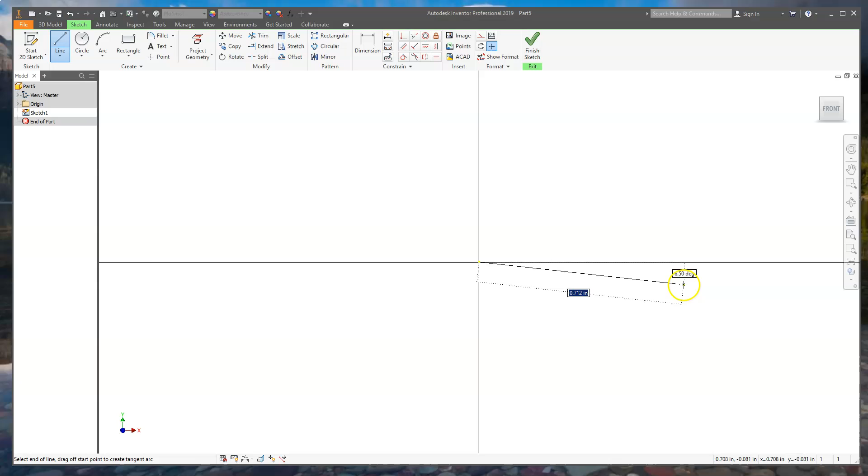So I'm going to do a revolve to make that cone. Going back over to Inventor, here we go. I'm going to go onto a sketch, go onto my XY axis, put a line on here. If you remember from the last video, I told you the key to success is get that overall length of your extrude on there first. So that is a 6 inch height. And then I'm going to click on the cube to zoom out here a little bit.

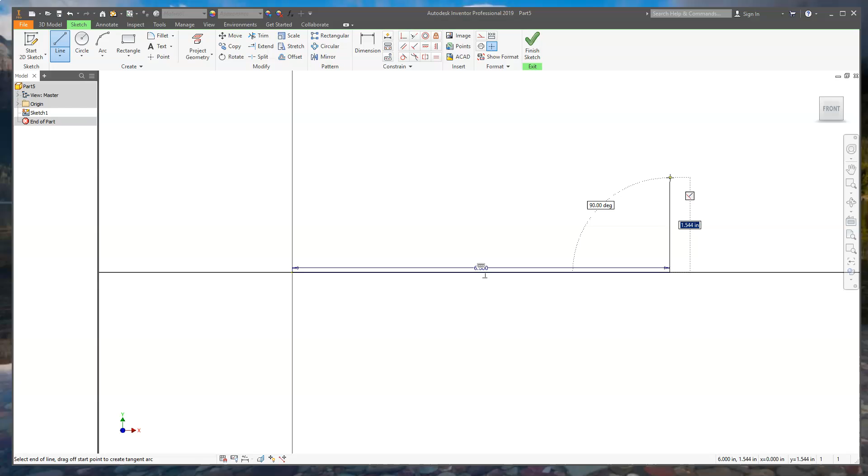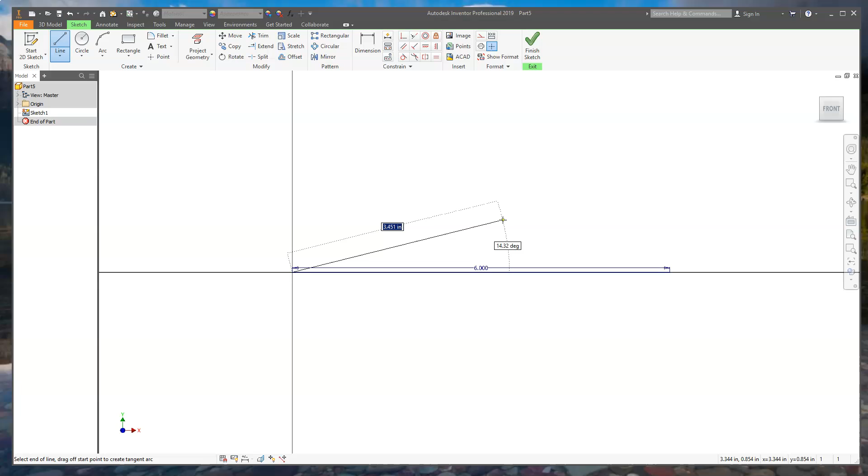And then if you look, my line is attached there, wanting to move perpendicular to that first line. But I don't want this. I actually want to work from the other end of the line now. If I connect here, you can see I've got a green dot showing that I've actually got to the end of a line or connection. And I start moving out here. What I want to do is move to degrees. So I'm going to hit Tab, move over to the degrees, and my overall degrees was 30. Because I'm just working on half of the cone, I want to only do 15 degrees, half of that overall.

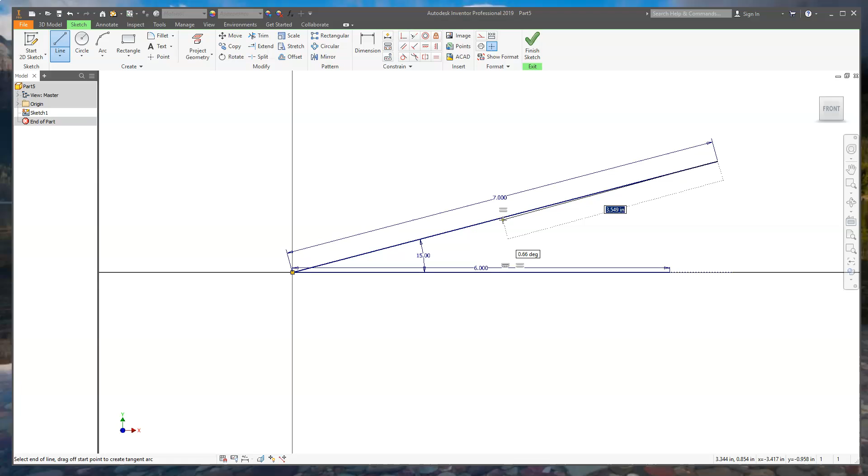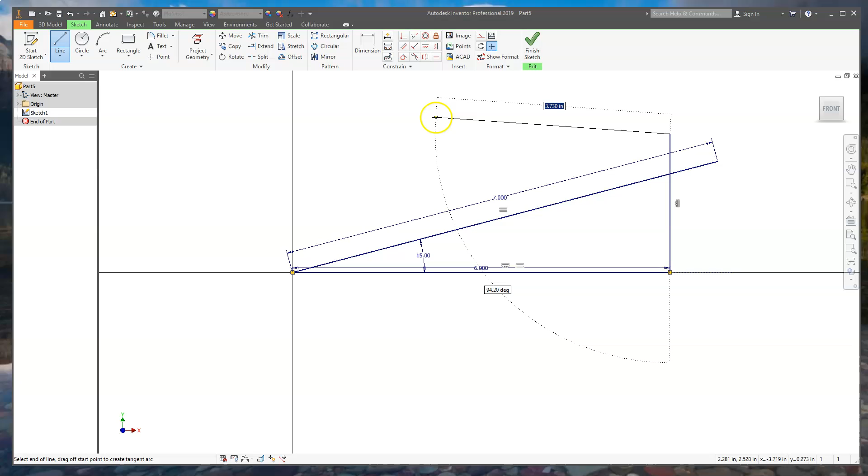Now I do not know the length of the other side, so I'm just going to go ahead and throw in something that shoots past where I want to be. So I put in 7 inches, and there we go, I've gone past the end of where I want my cone to be. I press Enter to get rid of that line command. And now I'm going to attach onto the end of the 6 inch line that I started with. I'm going to bring this up here and click that. And then right click to show that I am finished with my line command. So now I have two lines that I need to trim back.

So let me issue a trim command. I come in here and I trim back to the other line. I'm going to go ahead and trim this line. I click on trim. Oh, we've got a problem. It's constrained, constrained by a dimension. This dimension of 7 inches will not allow me to trim that because it says it needs to be 7 inches. What do I need to do?

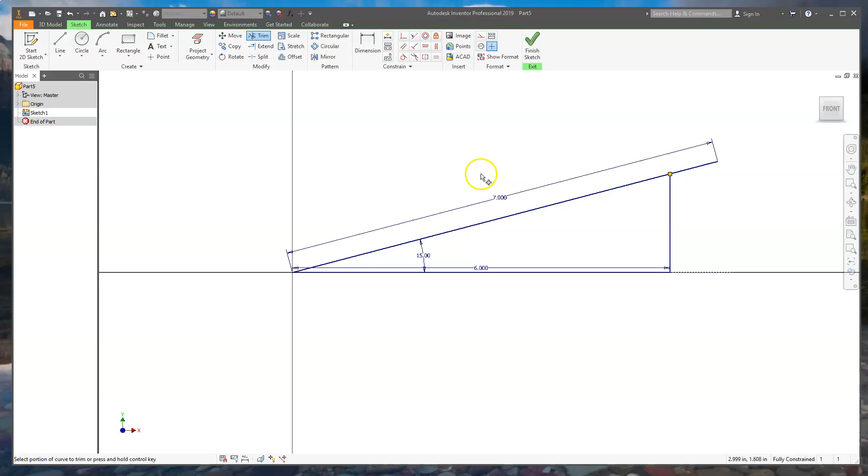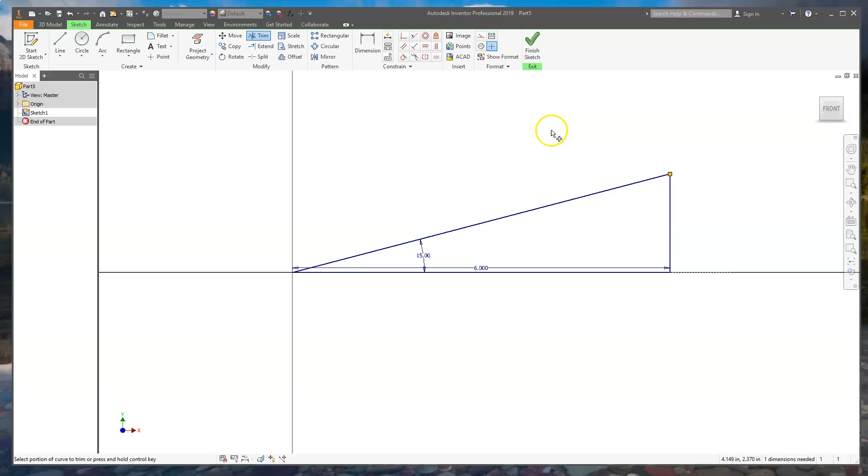I'm going to right click to get out of the trim command. I'm going to right click on the dimension and tell it to delete the dimension. Now I go back into trim, and there we go. I have to get rid of the constraint that's stopping me from doing what I want to do. I click on finish. I'm going to click on the house here to get the view that I want. I go up to the revolve command, it automatically selected the profile. I tell it that I want to do a revolve around this axis. I'm going to go the full distance. I click OK, click on the house again. There is that cone shape.

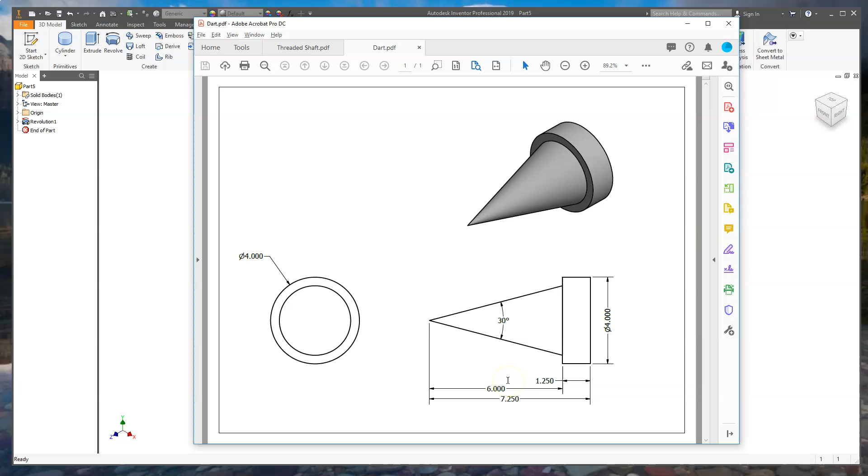Now I'm going to go back over to the drawing. I've got that cone on there. The cone has a diameter of 4 inches and it's 1 1/4 inches. So we're going to go in there and do a cylinder off this one.

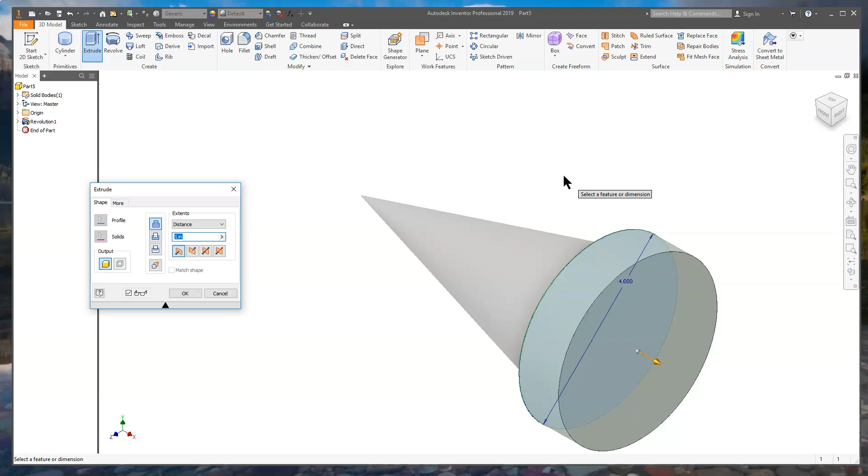And I lost that dimension, fell out of my head here. Here we go, 4 inches, that's right, 4 inches. So I go 4 inches, and then I extrude that 1 1/4 inch. I click OK and go here. There we go, so there it is.

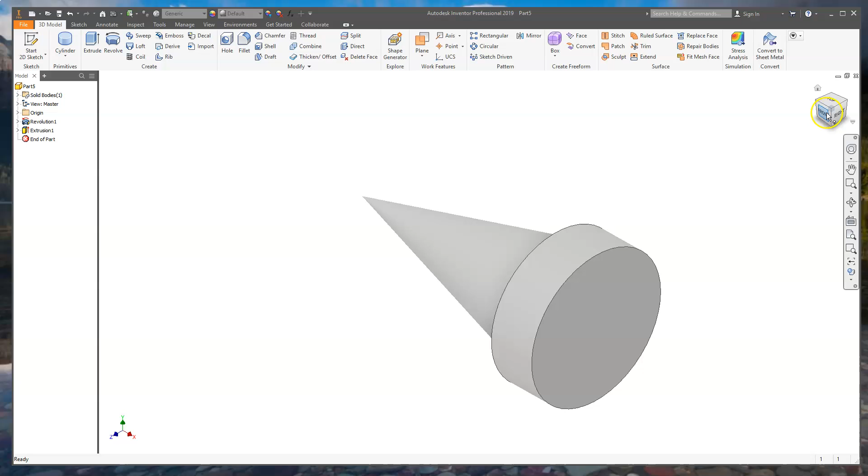But you know, I've got an issue with how this cone is laying in there, or this object. I'd really like it if when I hit home, that cone, that dart, was actually pointing the other direction. So I'm going to show you how to make that happen. If I go onto the cube right here, right now it says that this is the front. I go, this is front right here. I don't want that to be the front. I would like it if this was the front. Right now it's the left side.

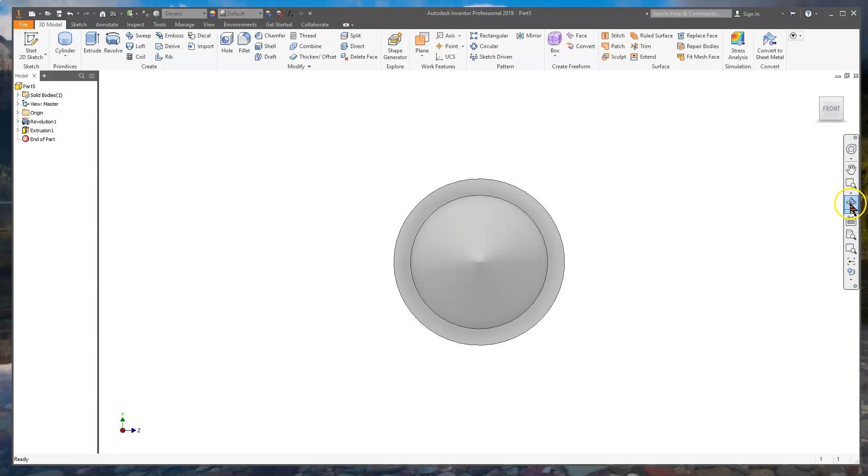If I right click on the cube and go down here, I tell it that I want to change this to be my front view. I now have front view, and if I go up top here, there you go, top view, front view. I'm now going to go in and free rotate this, kind of getting it in position. Click on the corner there, that's what I would like to be my home view. If I right click on that corner and go in here, I can tell it to make this my home view, set that as my home view. I'm also going to tell it to fit to view here. So now if I go here, there we go, fills the screen up.

So there we go, we've got that made.